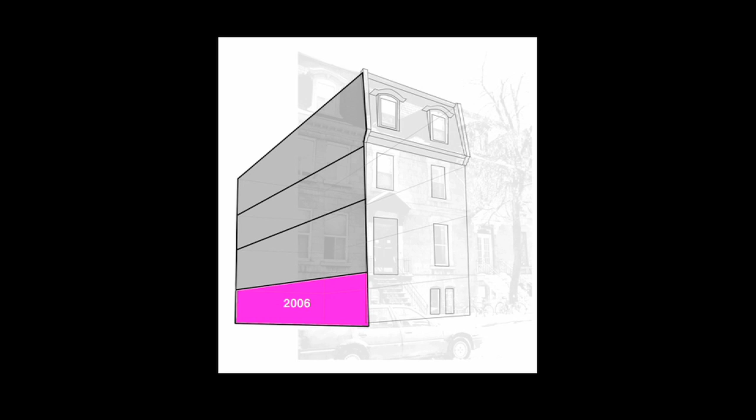I think this is a very practical way of starting up an office, to remain flexible in its organization. The sharing of infrastructure and resources between professional life and personal life makes sense, since the business of architecture is practically open 24 hours a day, 7 days a week. It actually makes your life a lot easier if your partner is your spouse, and some people might disagree. I don't know how Louis Kahn did it with 3 families, but that's another story.

So we used our house to practice, literally, and it was an extremely rewarding and fun decade, learning the basic difference between the line that exists on paper and its counterpart in the physical world. A simple opening represented by 3 lines on an elevation translates to cracked ceilings, desperately trying to save 150-year-old moldings that nobody knows how to reproduce anymore, lifting up a beam that takes 5 football-player-sized carpenters to hoist up, and hearing the whole building crack every time you cut a stud down.

So this was our kind of harsh reality of what construction could be. Another thing is, usually when you start out, this is the dilemma you're faced with. Everybody knows this catch-22, I guess.

So in many ways, I think design offices become multidisciplinary unintentionally, and we're constantly reinventing ourselves to respond to the arbitrary demands of the work that comes through our doors. This is made possible, of course, a little bit because of our arrogance and naivete, but more so we'd like to think because of our understanding that the contribution we make to society is not purely technical. So we often don't know how some things are done or built, but this is not necessarily a problem.

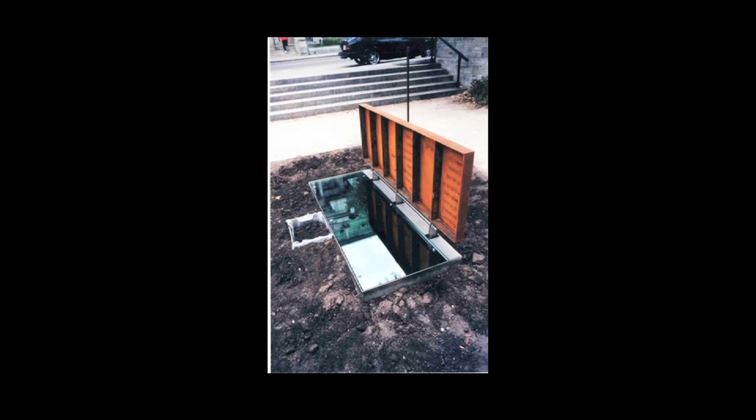It had an underground component to it. During the day, the mirror glass on the ground would reflect the doors of the Montreal City Hall. The site was right across from the Montreal City Hall. At night, the surface would project an image of the map of the first settlements from 1642. It was made out of corten steel.

Our practice began officially in 2001 with the resurgence of open anonymous competitions in the province of Quebec, as a result of a new policy put forth by the Ministry of Culture. It enforced a competition system to award contracts to any projects benefiting from public funds. The way it usually works is the government foots about 50% of the bill for construction projects.

At the time, we had very little knowledge about real construction techniques, so as a result of this lack of knowledge, we became extremely suspicious of the systems that are out there, and looked more into possible ways to collaborate with the trades to achieve a level of authenticity in our architecture that we admired in the works of many architects.

So a central preoccupation in the practice has been about making, I guess, the translation of intentions from one passive medium to an active one. A lot of energy was spent thinking how we could move away from pre-existing systems that have an inherent look to them.

In the context of North America, where contracts are drafted with the assumption that something would go wrong, this becomes quite a challenge, how to try to stretch the limits without voiding the warranty of what you use. So this was another experiment, back in 1997.

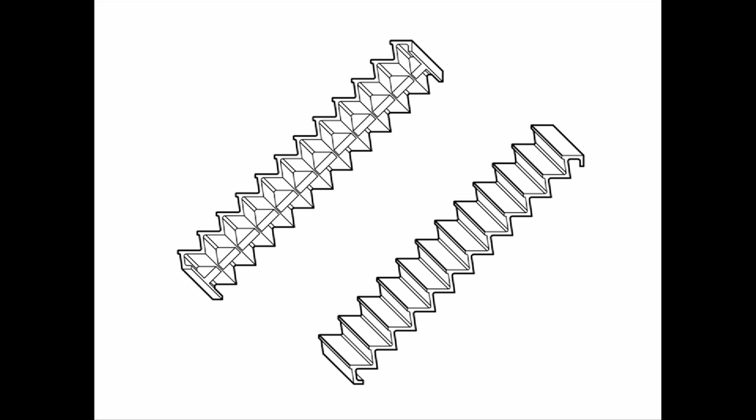It was a stair made of laminated plywood, built by one of my colleagues. His name is Dimitri Kubatis. We call him the human CNC machine. We're just using a flush bit with a router. He created a lamination of 22 layers of 7-ply plywood to extrude a stair with an integrated string groove in it.

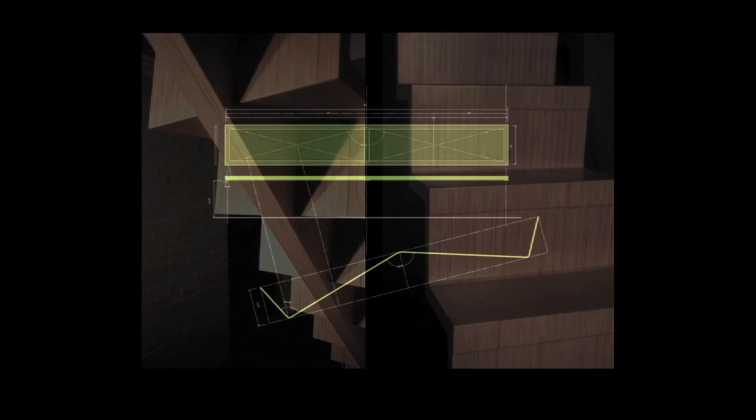It's almost 15 years old, but we still like what we did with it. I don't think there's a single architecture student who, coming out of school, did not design some kind of furniture, and this was another little experiment we did back then.

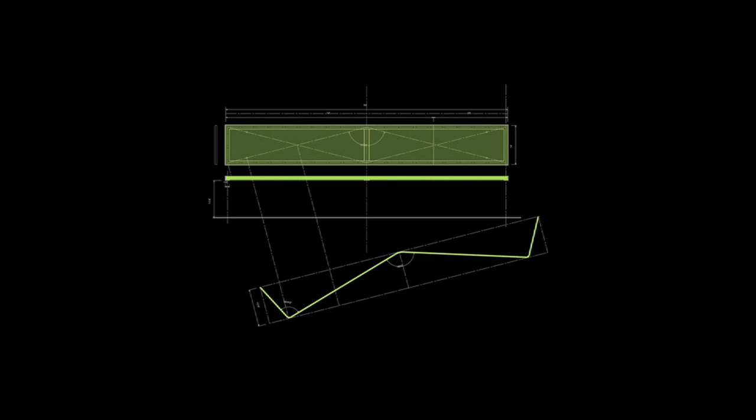It's a Belgian black stone bench floating on a cross brace of a half-inch, really thin stainless steel rod. Just by the way the rod is bent, you can support a lot of load on something very minimal. We worked with the same welder, using leftover materials from other projects.

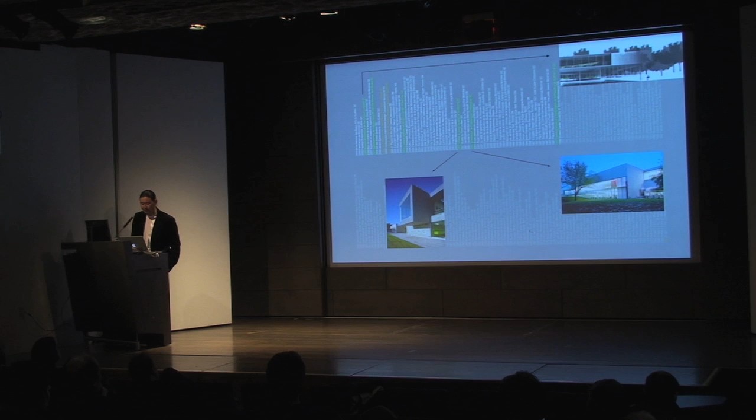So you'll notice that during those periods, we were not doing too well. We had a little baby and then eventually a second one. As Dan was talking about, it completely changes your life. Those were our turbulent years of trying to deal with family life and still try to run your own independent practice. The only thing I can tell you is that sleep and memory are very much linked together, and it affects your work.

The fact that most of the competitions are held in Quebec within Canada has certainly elevated the quality of the work. In 2006, for example, 8 out of the 12 Governor General medals, which is the highest distinction, went to Quebec offices. We got 2 for our first 2 projects, and we had a really good jury that year.

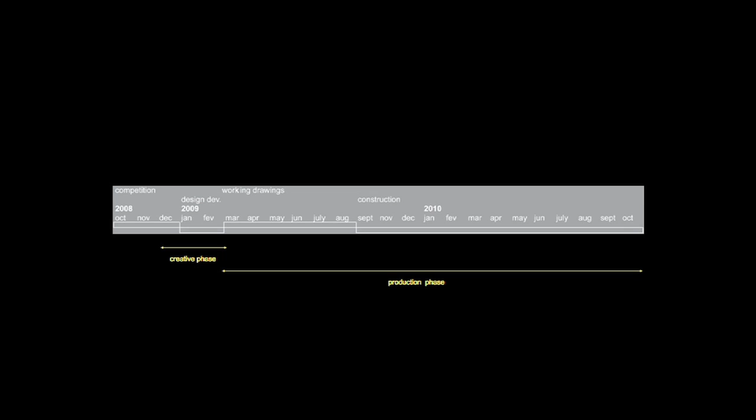All of this was great for us, and we thought our career might take off from that point on. But it didn't happen in the stellar way we thought. Instead, we were hit with a few hard realities of the profession, one of budget and the other of time frame. Our work stemmed from the process of architectural competitions that supposedly, through its mechanism, promotes innovation in design. We decided to look into the timeline of the architectural contract and came to the conclusion that the odds were stacked against us.

In our experience, the short timeline that competition projects offer means the design phase itself is extremely short compared to the actual execution phase. There's no doubt in our mind that competition encourages experimentation, but innovation, on the other hand, we feel is very much tied to construction costs and to time. To innovate, to do something new or different, means to some extent deviating from what the construction industry knows how to do, which usually translates to costing more money or more time.

When we think of innovating, for example, with the building envelope, it implies having the time to do research, to build mock-ups, to work with the industry, trying new assembly methods, and still, while doing all of that, making sure the client can maintain some kind of warranty for the system being placed. So this has always been a problem in our design process.

And from this mindset, our interest in the practice of architecture grew as a way to cope with the seemingly impossible reality of having a productive career that was both personally fulfilling and sustainable, not in the ecological sense, but in the sense of sanity, especially with children making it that much harder to have a productive and fulfilling time designing things. Not that they're bad, but you just don't have the time to do it. This is an ongoing research in our office.

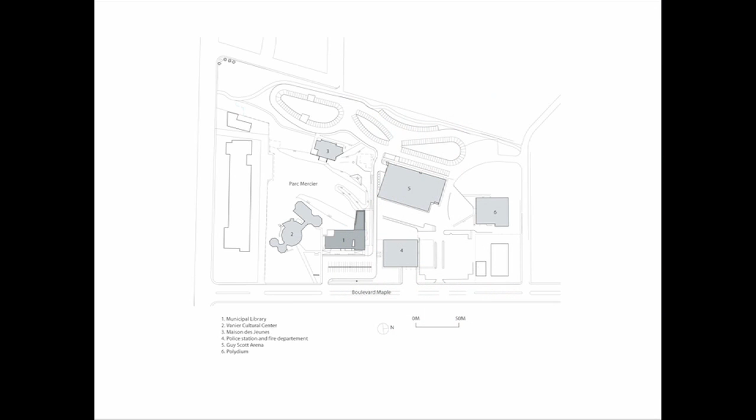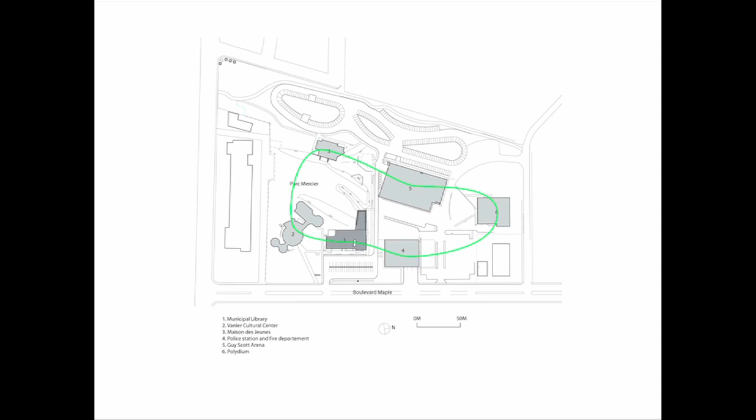So the actual site of the competition was the Civic Park, circumscribed by buildings which housed some civic functions. There was a gymnasium, a skating rink, a swimming pool, a cultural center, a newly erected youth center, and a police station right next to it.

So our strategy was to integrate these level changes that result from the undulations into the organization of the building program. We also wanted to have as small as possible contact to the ground to disturb as little as possible the existing park and its trees.

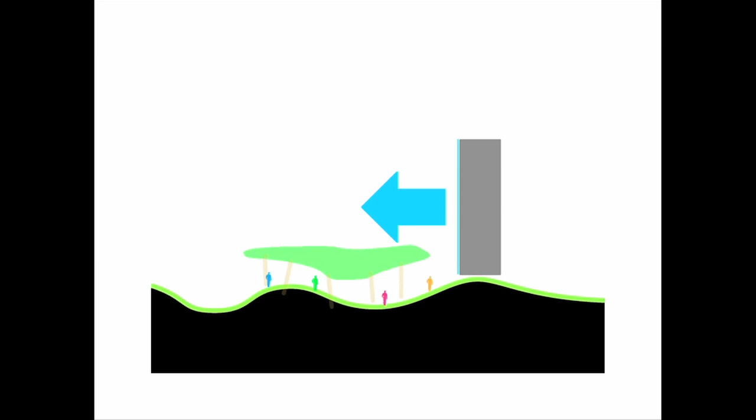So we first imagined a 5-story tower of books which would become a backdrop to the civic park. So the life of the library and that of the park start to create a dialogue.

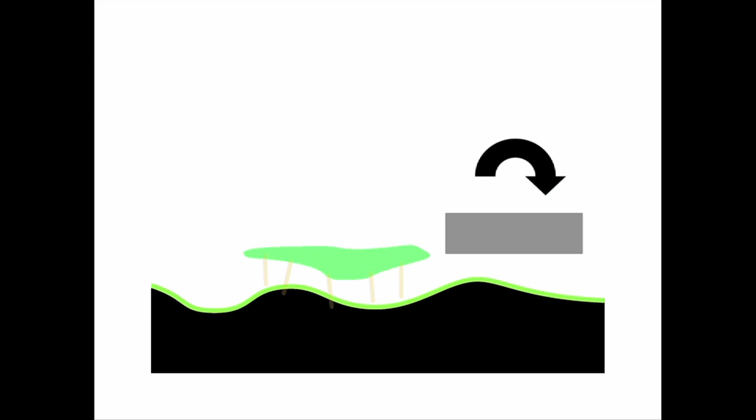But after the first phase, we were asked to lower the building to a maximum of 3 stories, and so the tower got turned to its side. This was actually an interesting thing for us because now we had this hovering volume over the landscape.

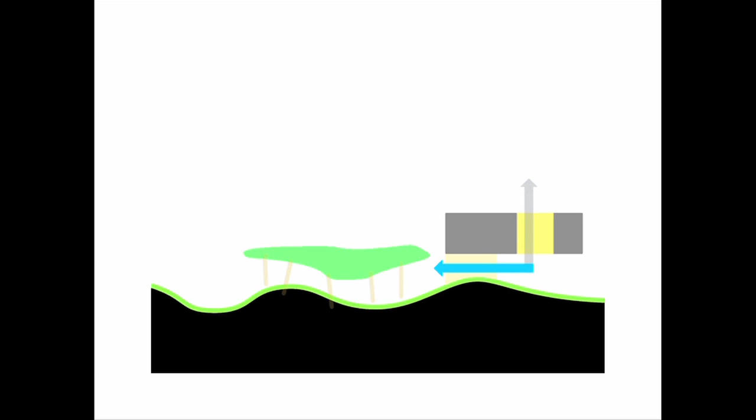Because we maintained a small contact of the building to the ground, we could start blurring the edge of the building. What I mean by that is that one starts to experience the architecture before you are inside the building itself. This is further reinforced by introducing 2 light courts into the rotated tower, which organizes the reading room inside by providing natural daylight and also connects the outside to the inside of the building.

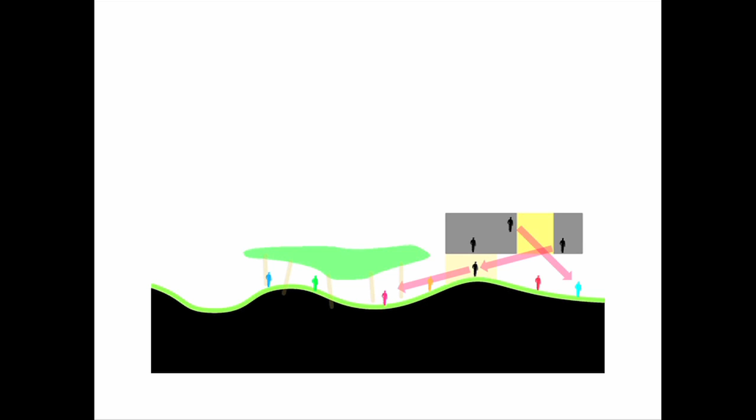By separating the program of the library in terms of noisy zones and quiet zones, the basic organization of the library became the noisy part on the level of the park, and the quiet part here in the gray zone, in the upper 2 levels.

So just to briefly situate you, here is the main entrance into the building, the ground floor, the 2nd and 3rd. You can see the 2 light courts represented in yellow and a blue children's mound that's related to the children reading area.

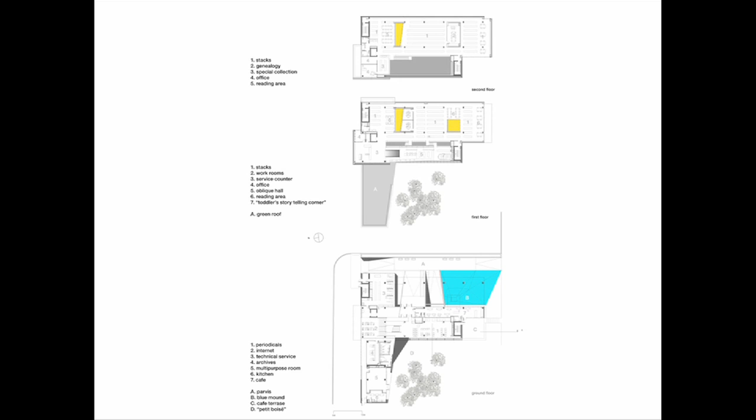So the ground plane of the building follows the contours of the site, and it splits in 2 via a grand stair. This is the ground floor plan, and this was the active, noisy part of the building where people in the park could stroll into the library from all directions.

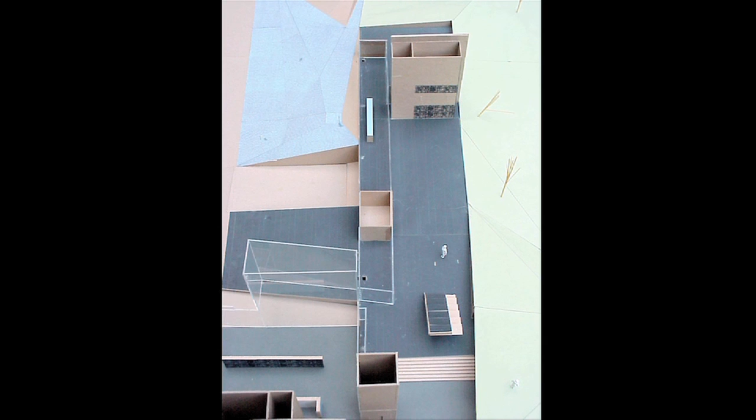We strongly wanted to open a glazed facade to the park itself, but it was refused by the librarians due to control issues. The more traditional functions of the library were located on the upper 2 levels, as you can see here.

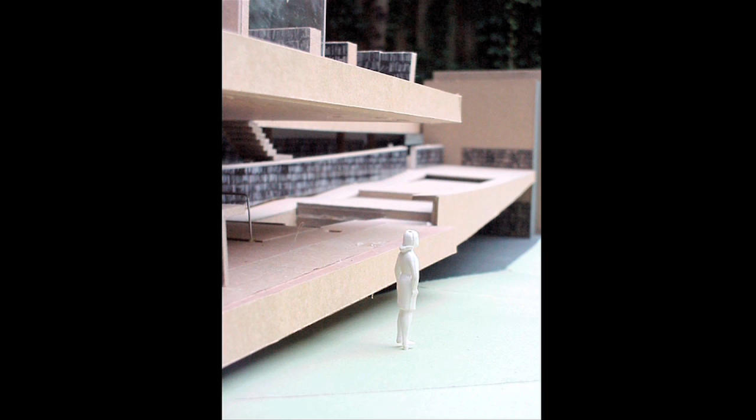As you puncture through the main staircase going up, you arrive at this quiet part of the library that starts by this sloping plane, which we call the browsing plane, where all the references of the library were located.

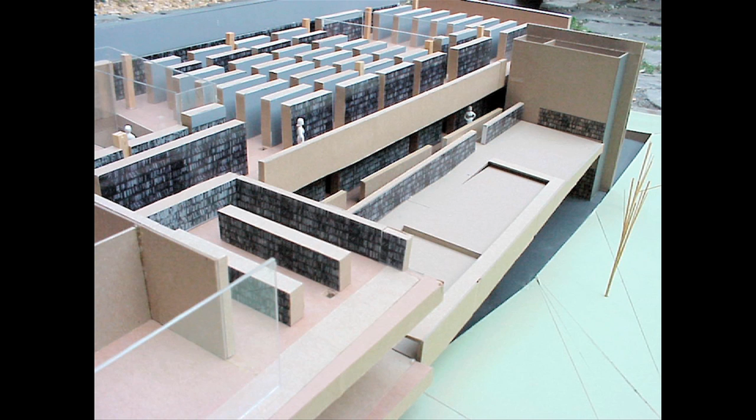We saw this as an artificial extension of the natural topography, so the berm of the park comes to meet that sloping plane. We wanted to create a close connection between the landscape and the inner spaces of the library. This sloping plane or platform is where you actually do the research, look up books, and where loans and returns are controlled, giving visual clues as to where the collections are located. Here the stair goes through the sloped plane, and on the right a signage wall was created to indicate all the collections.

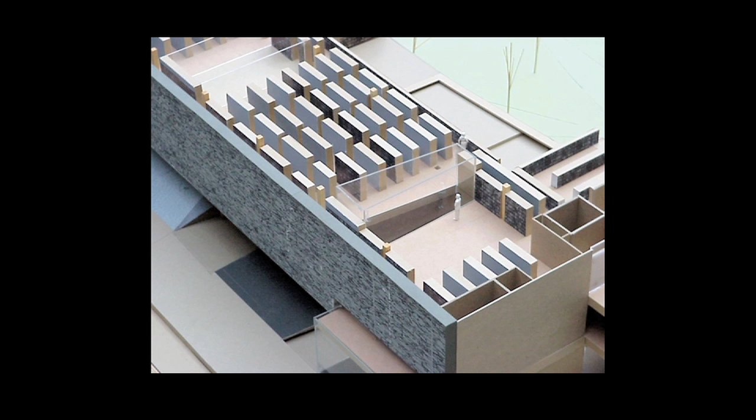Once you arrive at the browsing plane and find a book, you enter into the dense stack of books. Within this, you discover clearings, which are reading areas, giving you views back to the exterior, as well as diagonally between different floor levels.

The idea here was that on the landscape plan, we wanted to introduce this blue mound made out of rubberized asphalt. My partner imagined it would be amusing if kids could tease each other as they're stuck doing homework, and their friends could come up without actually entering the building, poke their head in, and call out to them. We like this kind of play and whimsy in our projects.

The structure of the building was quite straightforward, except perhaps for the sloping floor and green roof, which was conceived as a continuum of the landscape.

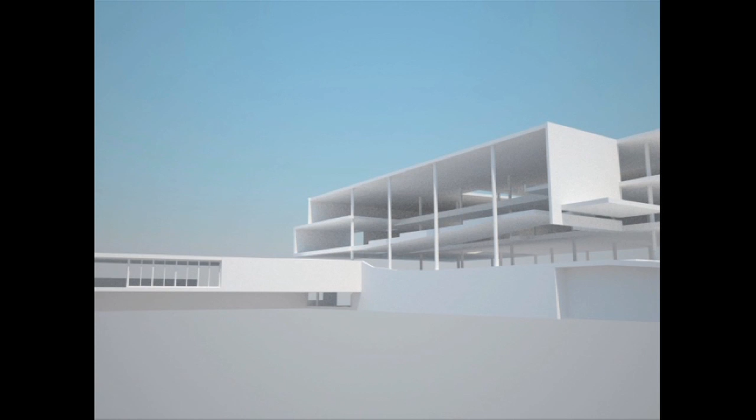Originally, we imagined that the underside of the sloping floor should be free, that it should float over the landscape, kind of like this, to reinforce the sense of continuity.

Initially, we thought we could delicately suspend it from the ceiling, and we had visions of fine, elegant suspension members holding up the sloped floor.

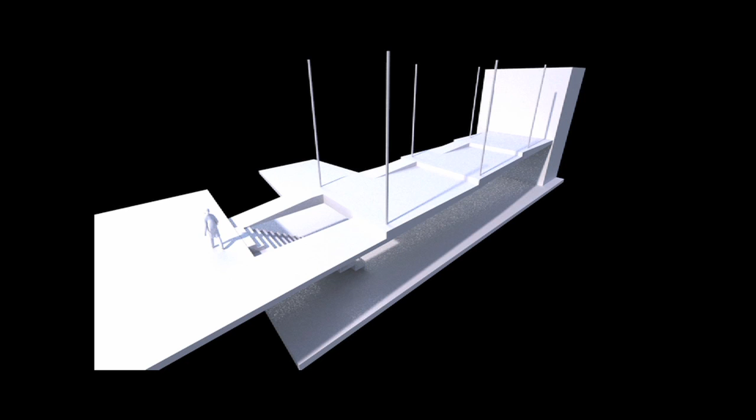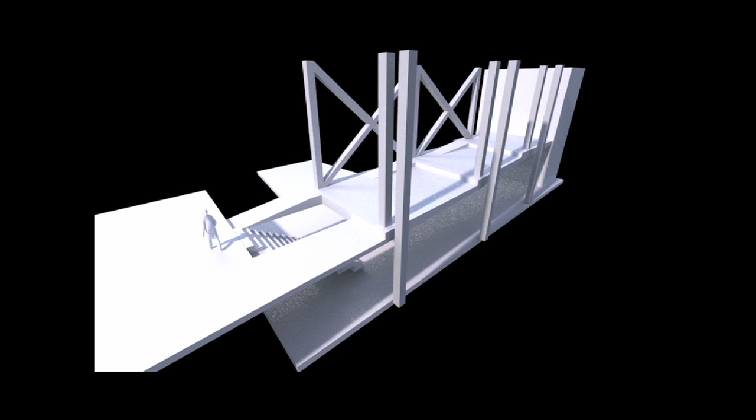Then the engineers came back with their own version, which completely clogged up the actual sloping floor. After several ineffective attempts to deal with them, we concluded that perhaps we should just hold the sloping floor delicately with inclined columns, so that the columns act as artificial tree trunks. We introduced instead this 30-meter long post-tensioned beam to liberate any kind of structure from that sloped plane.

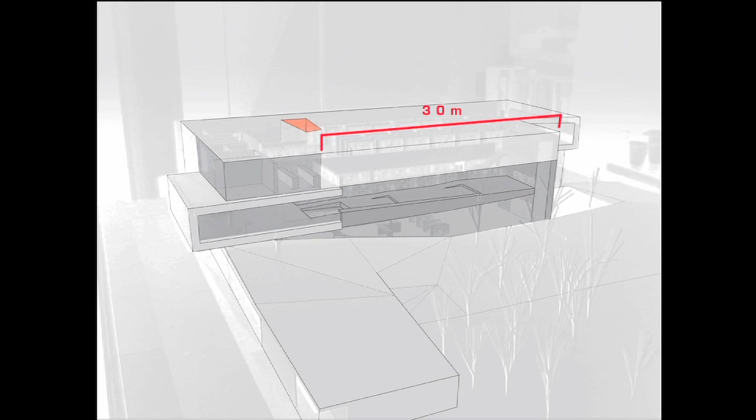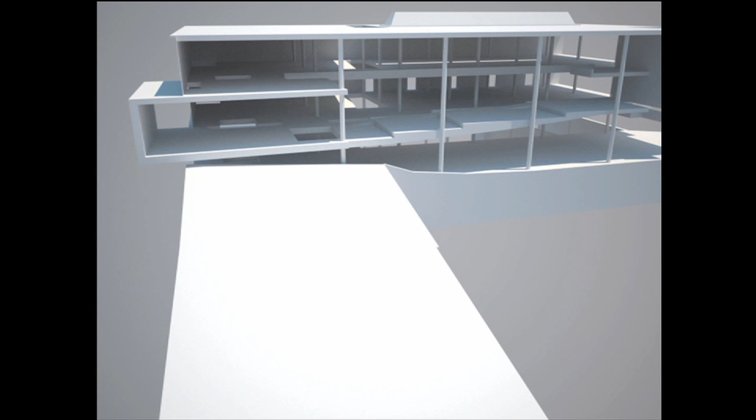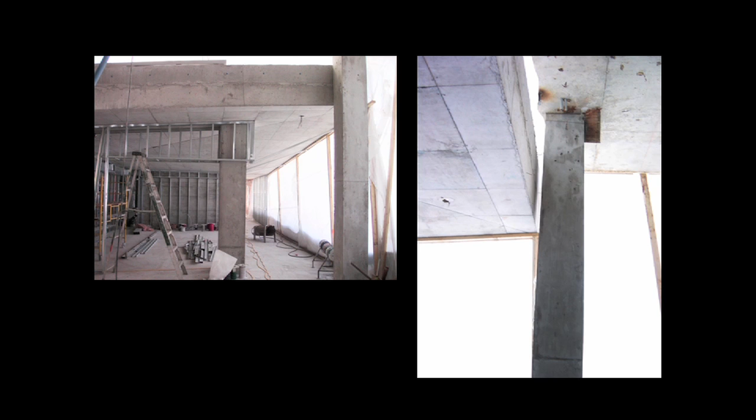This part was kind of a triangulated plane, and we wanted it to be completely independent from the rest of the building structure, so we had to come up with this column that is essentially a few inches away from the slab that comes to meet it. Obviously the engineers find it completely inefficient to do something like that, but we needed that tension in the experience to emphasize the feeling of going underground.

We were very involved with the site supervision phase, and it was fascinating and daunting to see the lines we drew becoming solid walls of concrete. Obviously there are no undos once you get to the building point.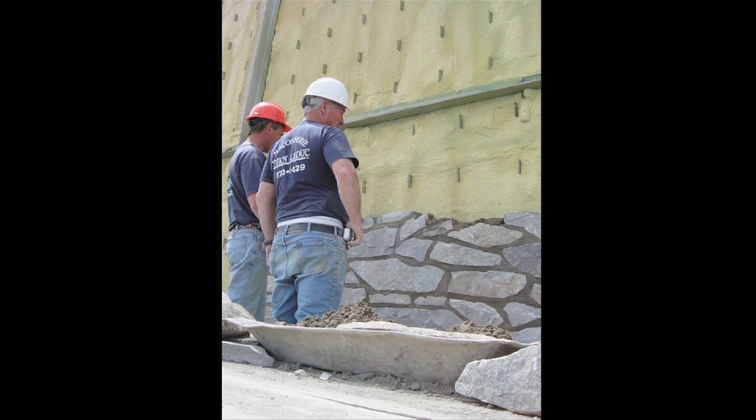Being on site is the best way you can learn about other ways of doing things, and this is another advantage of running your own office. You get to spend a couple of nice afternoons talking to the workers on site.

The next project, the competition for the theater in Terrebonne, was announced the week our tender documents for the library had to be finished. We literally finished the working drawings, and the next morning we started working on the competition for that. This was another two-phase anonymous competition.

The site for the Vieux-Terrebonne was a contrast to that of Chateauguay. It had a lot of history, and it was beautiful, and frankly, it was, in our mind, quite inappropriate for a theater, in a sense.

This is the old part of the city of Terrebonne, and there is the green area along the river. The whole area was developed by local residents, and this is one thing that is quite unique in Montreal and this periphery — a lot of these grassroots organizations do a lot of preservation and make projects happen. So it has a library, it has a sculptural garden. It's all quite beautiful.

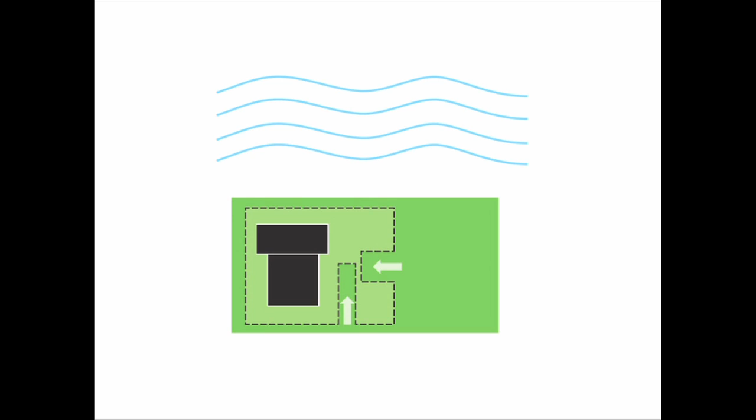So we imagined spatial experiences in the form of gardens inserted into the theater. This was not an additive element to the given program, but a way to requalify it, expanding the program of the theater beyond the boundaries of the physical building envelope.

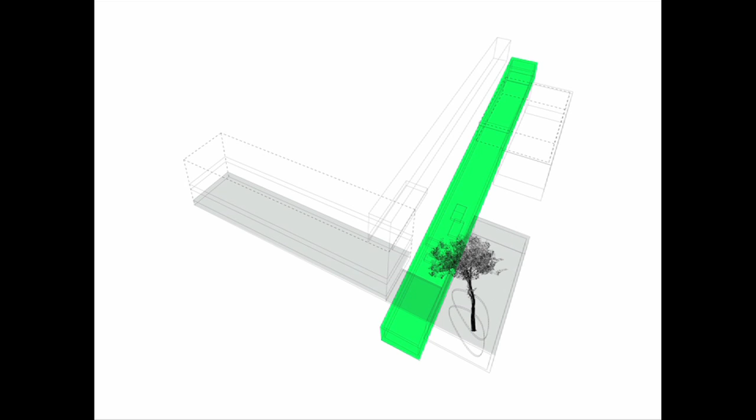As a visitor to the theater, moving towards the auditorium proper becomes the predominant part of the experience of the building, so we wanted to make this movement the primary spatial quality. Instead of imagining a series of program elements connected by circulation, the circulation morphs to accommodate the programmatic requirements. The gardens that cut into the building allowed us to create a platform to investigate a new kind of relation between the visitors to the park and those to the theater.

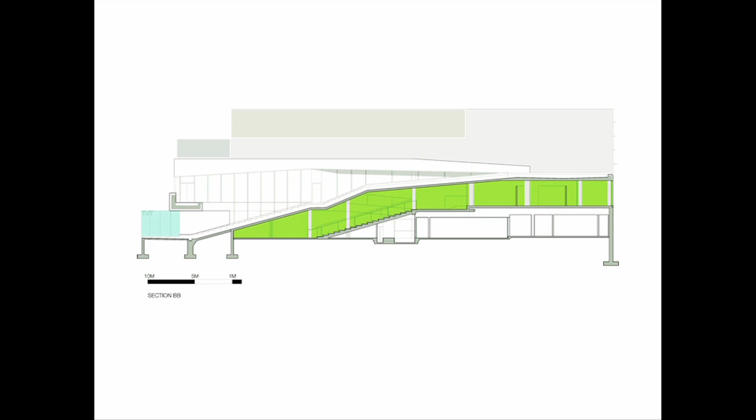So we introduced what we call the double-deck stair. In section, there's an inside stair and an outside stair, one going to the roof terrace, freely accessible from the park, and the other going to the upper foyer. This physically puts the stroller in the park on top of the visitors to the theater. The lower interior stair is for accessing the balcony levels and the bar, and the upper exterior stair accesses the rooftop terrace directly from the park.

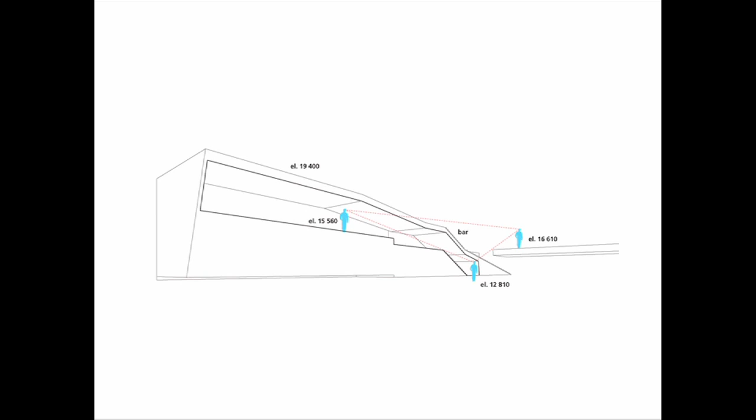So the bar becomes a reference point around which you move, and after all, alcohol is an important social lubricator. The idea is that the life of the park intersects the activities of the theater and animates it, creating a symbiotic relationship between the two.

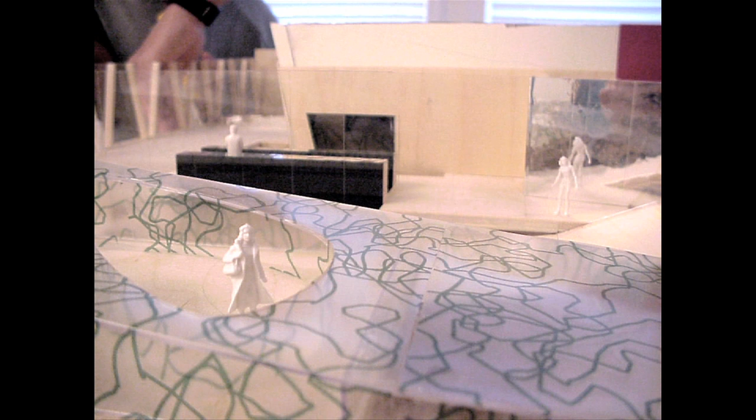We're also interested in the spectacle of theater going as a social act, where being seen becomes as important as seeing, where the observer is clandestinely transformed into the observed.

This becomes particularly true for people who purchase the more expensive loggia seats with their own private bar in the back. Here in blue, in plan of the balcony level, the red is the corridor or the program space.

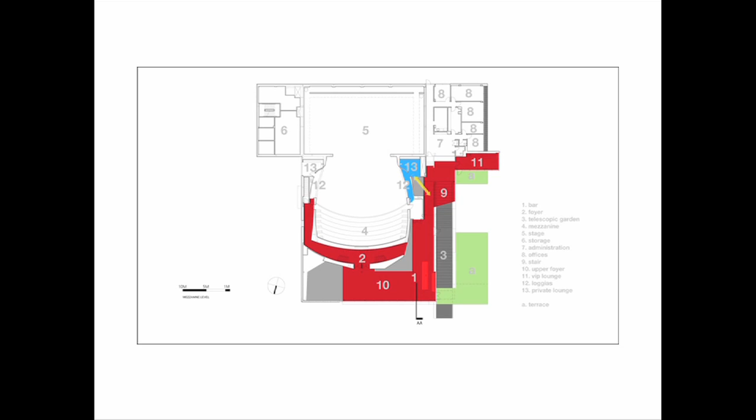So you move towards the spaces that are reserved for the exclusive, and at the end, you kind of pop back to where everyone is, creating an involuntary exhibitionism and giving an audience to the VIP. They're also visually interconnected between themselves, so the upper level loggia can look inside the lower level.

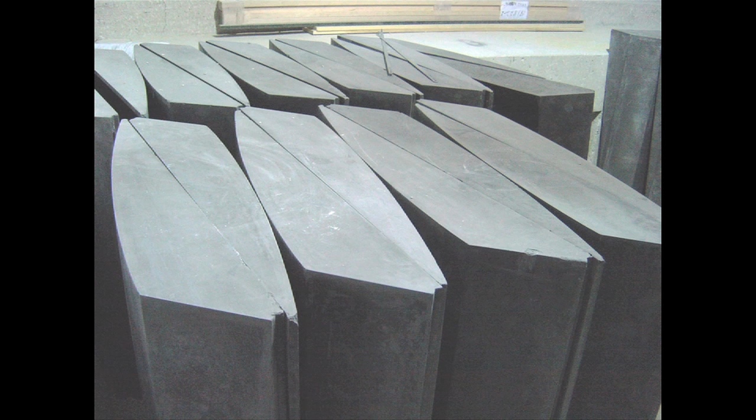So as I was saying, the production architecture in Montreal, and probably North America in general, tends to become very prescriptive. This is particularly true with the exterior envelope of the building. Oftentimes you end up specifying products from catalogs with minimum and maximum dimensions, certain acceptable details, so you won't void the warranty.

We find this a very frustrating part of the practice. So when we were asked by the acoustic engineer to come up with some kind of wall treatment, we jumped at the opportunity, wanting to try to do something from scratch.

We had met this rep, a Moroccan artisan who does traditional Victorian moldings, who had visited our office because he's a resident of Chateauguay. So we called him up, and we produced three types of acoustic panels for sound propagation out of fiberglass reinforced plaster.

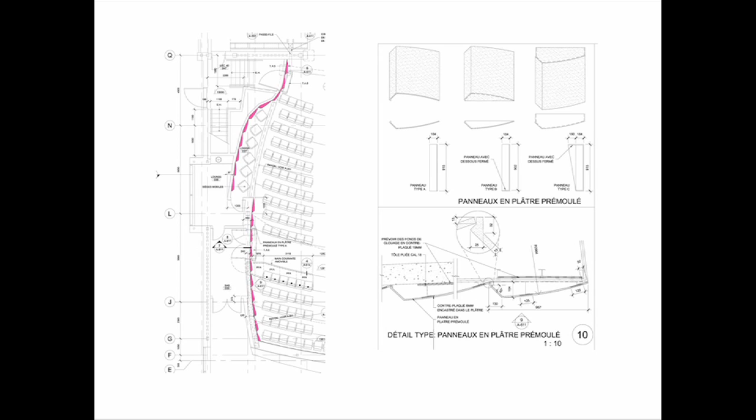An acoustic consultant usually does this in MDF, which he paints, and we find MDF a terrible material. So this guy basically produced all of this in his garage, about 900 little panels on his own, and came on site and hung them.

So this is some of those views. They are gray because of the requirements of the theater consultants. The interior of the theater had to be easy to control in terms of lighting.

But instead of just painting them, the pigment itself was mixed into the plaster, so even if it chips or cracks, the color remains the same throughout. With time, they would develop a patina, like how certain natural materials like stone or wood would do.

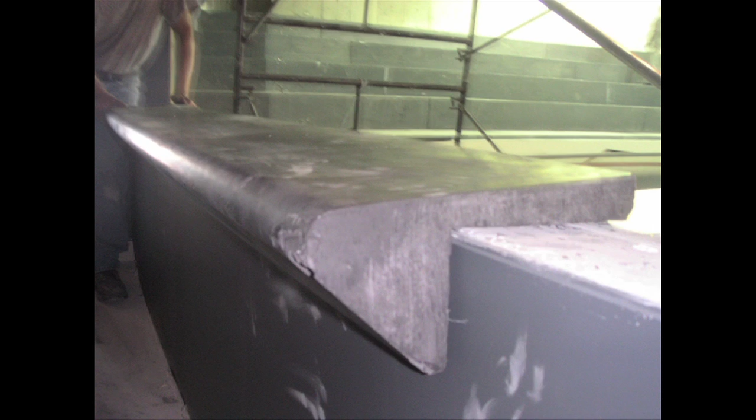So we also poured some of the coping details on the theater. And this is some of the views of the interior of the auditorium.

We do a lot of mock-ups in our office. We don't do the real size, but we often do some in foam core. Specifically, we're trying to check the clearances because they're quite deep, almost 16 inches deep, and see how it would feel once you're sitting on the upper levels. And this is kind of a finished view of it.

So here you can see all the panels covering the walls of the auditorium, and this is a close-up of the panels. The blue light is from the private lounges that the VIP people could use.

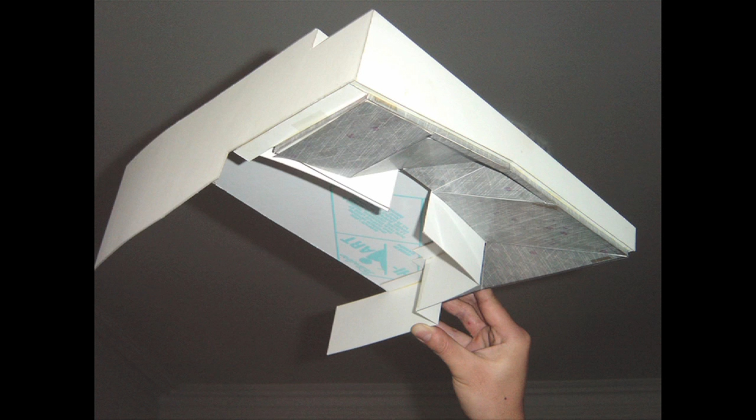This was another exercise in budget cutting. We had created this topographic ceiling plane, and here we use expanded metal, kind of like here actually.

It was interesting to come in here to see this. It's much nicer here, but back then we were just trying to solve a very serious issue of budget. We discovered that we could just use perforated expanded metal and bend it to give it some stiffness and create our own interlocking system.

The whole ceiling, in terms of material cost, was so negligible that it was obviously accepted by the client. And the ceiling kind of sinks down into the lower level.

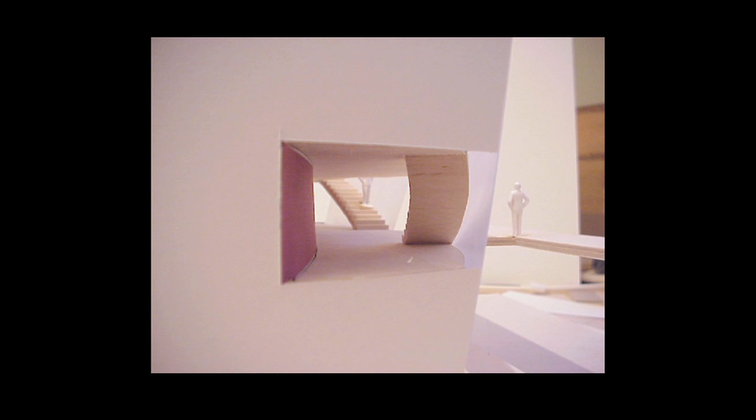This is the main lower level, this main stair going up to the foyer. We were exploring all kinds of things, doing a lot of large-scale models, and the great thing about big-scale models is that you suddenly find a lot of fat in buildings that already exist, especially in building types like theaters, because there's a lot of level changes.

So we created an extra space without paying more for it by using the underside of the seating. That was a small little room that you would enter that acts as a SAS for the upper level, and from that you could look back out. So we have these kind of extra spaces that look inside one another.

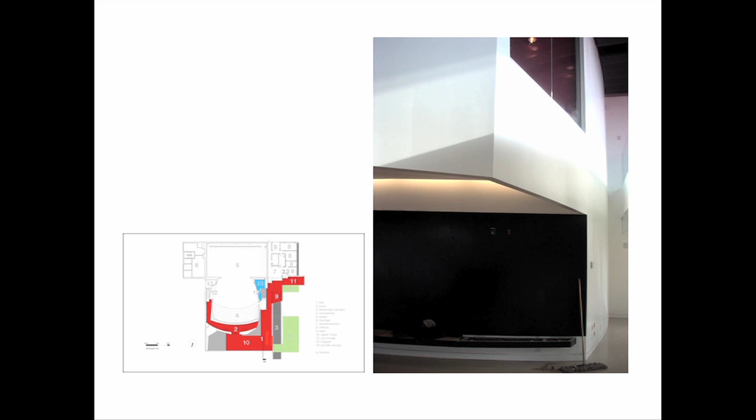And here's the shot of that room. It's all painted in red for the sake of drama. And then the stair taking up to the balcony level.

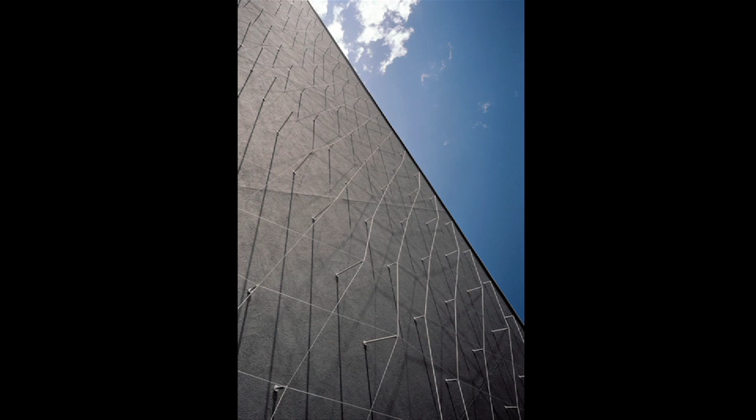And this was the back side of the theater. We devised a little trellis for support for a vine over the cheap stucco material that we had to use.

As part of the siting strategy, we mitigated the height of the fly tower by berming up the landscape. Then we kind of extended that same motion with an undulating green wall that still needs to grow. This green wall wraps around the corner of the roof terraces, and this is where the administration block is.

The people who work inside on a daily basis can just step out into the theater itself, into the park itself, without going through the main entrance.

So this is the double deck stair with a VIP lounge kind of hovering into the park. Here's another view. And this is the kind of green room right underneath it, painted green.

And the rest of the building was covered in zinc using a traditional method called tôle à la canadienne, which is a Canadian-style flashing, if you want. So local people who do a lot of silver flashing roofs submitted to do the work. So we kind of used that.

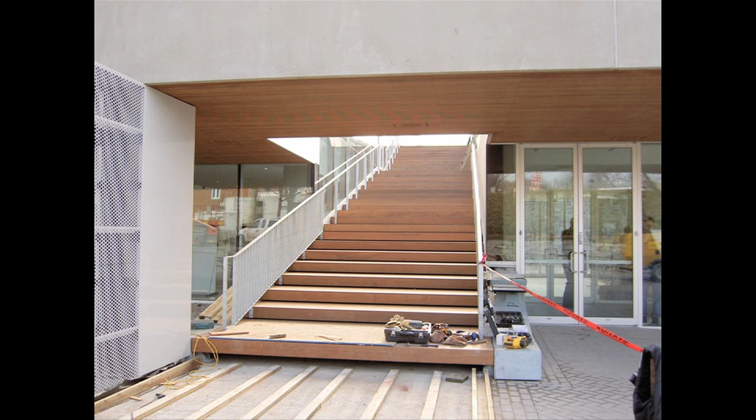And this is the exterior stair going up to the roof terraces. And here, the materiality of the soffit is quite important for us because we wanted to express, kind of give a sense of puncturing through a mass.

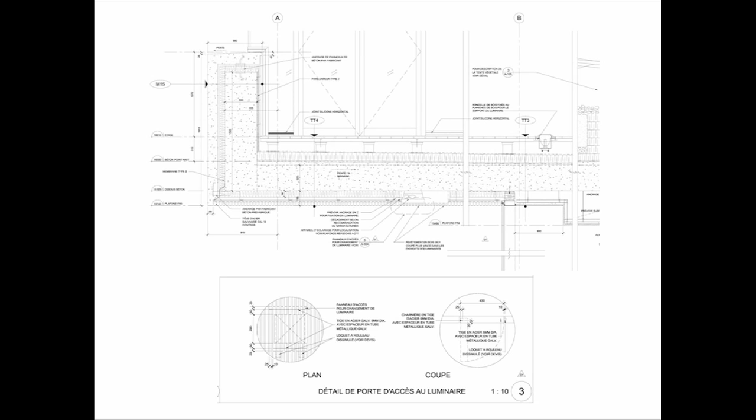So we didn't want any sort of articulation in terms of whatever that needed to be put in there, so the lighting fixtures were kind of embedded. And every time you have a lighting fixture, you basically have a play of spacing, so the lighting could be integrated within that.

And this is the third project that I will talk about, which was our last competition entry that dates back to 2008. It was another municipal library project in St. Hubert, which is another community south of the island of Montreal.

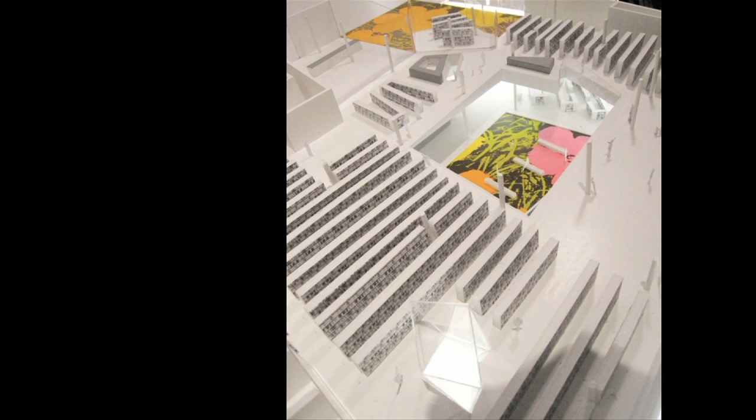So in our 15 years, we've always kind of worked outside the island. We haven't been able to build on the island of Montreal yet. We're still working on it. And it is a typical North American suburb with very little context to speak about.

We also came to realize that due to its geographic location, St. Hubert benefits from unique meteorological conditions, resulting in remarkable potential for wind energy. So we wanted to imagine the potential for the architecture of the new library as sculpted in response to this force of nature, poetically materializing and celebrating the presence of the wind while technically seeking to take advantage of the resource for its bioclimatic strategy.

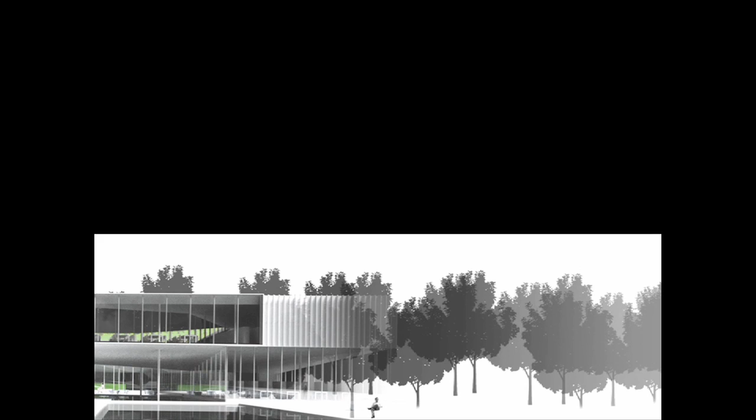So the concept became very simply a flying carpet made of wood, a filigree construction that would levitate over the site and would symbolically give back the wood to the forest itself. So here's one of the first competition renderings.

The upper part of the building is what we think of as the habitable thickness of the flying carpet. And while the ground floor remains transparent, it opens up onto the public place and it creates a dialogue with the tree trunks. So as such, the architectural concept of the flying carpet was not thought of simply as an architectural gesture,

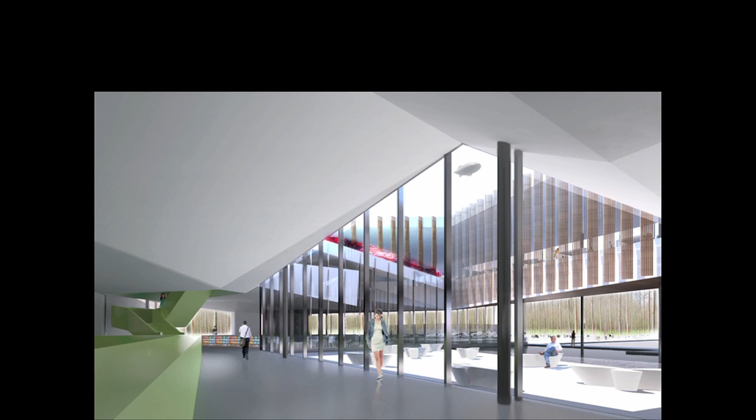The envelope was conceived as a climatic device, or the filter around which you organize your program. This is the view from the ground floor main service counter looking back towards the public space. The programmatic elements are organized in a single continuous movement that unfolds from the public place to the forest, delineating a central open court, very much like the cloister of a monastery.

This exterior court forms the geographic, social, and perceptual heart of the building. It's a variation on the idea of the cloister as a contemplative space, a space of light and quiet where the reading room is located. And as with the traditional cloister, one circulates around it to go from collection to collection.

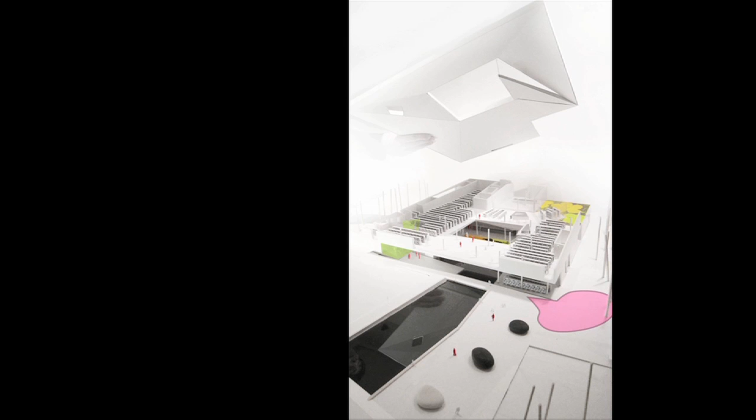So just to orient you, here is the overall shot of the model showing the public place with the retention basin for rainwater collection. That basin also acts as a proper threshold to the park itself. You see also very well here the geometry of the roof, which is reflected in the ceiling topography. The ground floor plan forms a U, while the upper floor plan becomes a full donut.

The full donut obviously delimits the cloister, and then all the collections are organized around it. On the front facade we find the main reading area, bridging and forming the porte cochere, which is meant to be the gateway into the public space of the library.

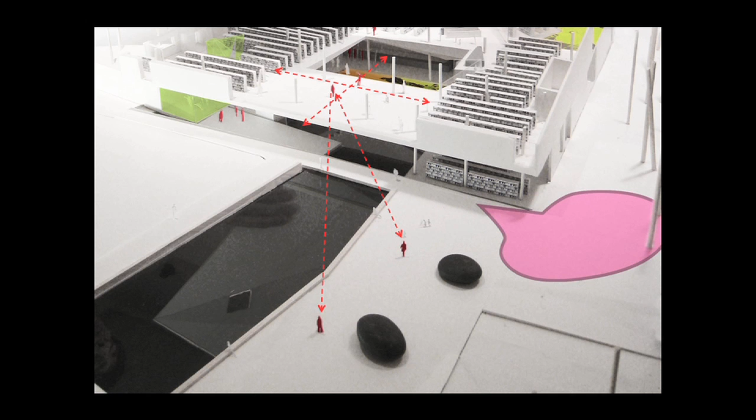It also acts as a programmatic signal for people walking in the park, so they can see people reading in there. You can see on the model how the roofscape was shaped according to the prevailing winds on site.

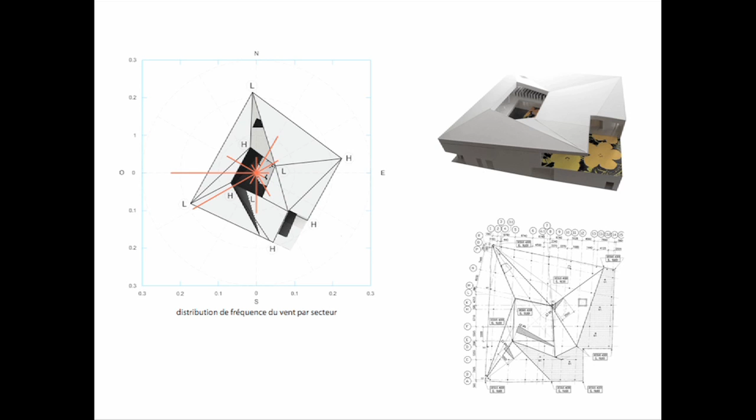Essentially, we positioned the building using data of predominant winds and tried to sculpt or adjust the heights of the roofs so that we could create a natural ventilation flow that would help the interior ventilation.

A large amount of floor-to-ceiling fenestration and operable windows also allow for an intimate relation with the park. A lot of our buildings used to be closed, especially libraries where book controls are important, but we wanted people reading to be able to smell or feel a breeze as they're reading.

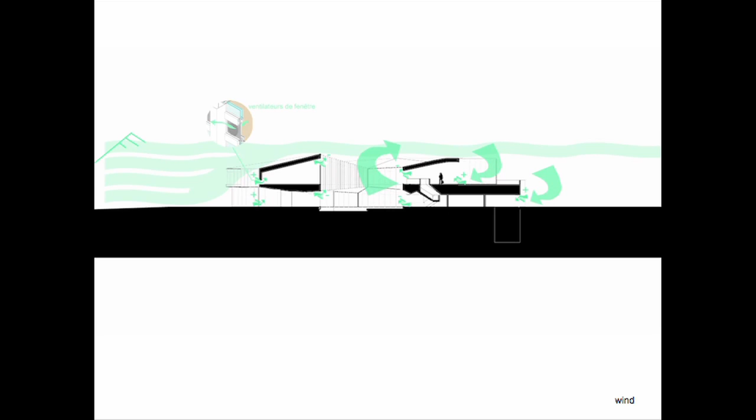In the summer, the rain collected in the retention basin will evaporate and further cool off the microclimate of the court. The building is also equipped with passive geothermal systems, and when cooling needs exceed the passive geothermal capacity, geothermal fields would provide 100% of the building's energy.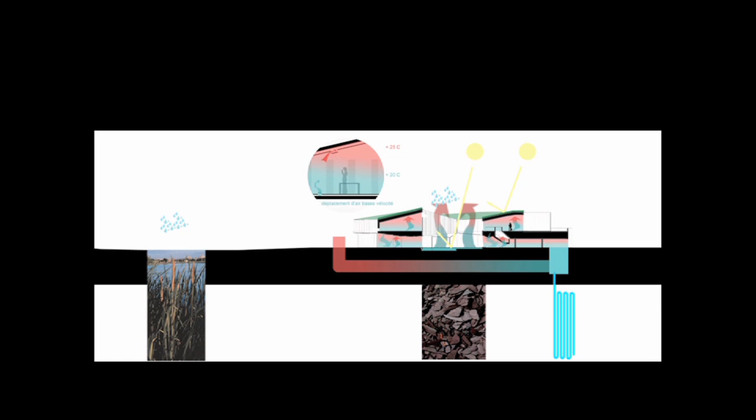Here was the structural strategy we put forth to the engineers during the competition. Unfortunately, engineers do not get very passionate about architectural competitions, and we learned from our past experiences that unless you come up with something to deal with the budget issue, which is a central concern for us in Montreal...

We don't build for $30 a square foot, but our budgets are not extravagant either, so we wanted this to be buildable by anybody who deals with steel. We came up with this idea, essentially laying the grid out, and identified which would be special steel members.

Here it's represented in the red beams, which have a kink, and the yellow beams are the ones that define the valleys and ridges. The rest of the structure was basically the same as a standard Home Depot kind of construction.

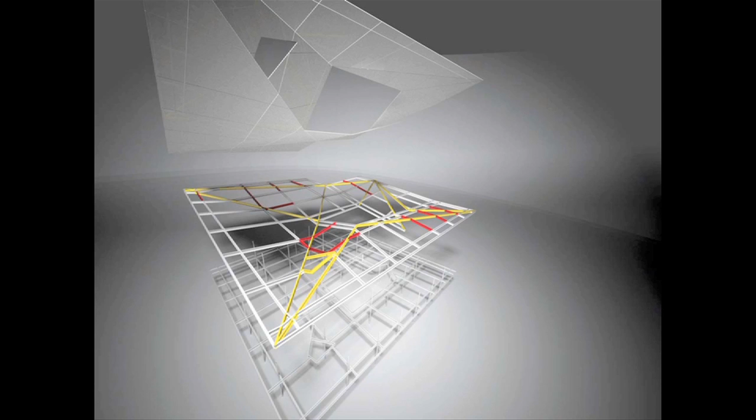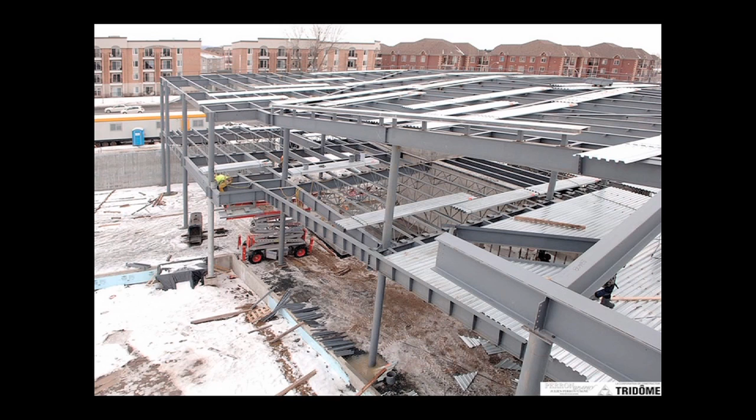That kind of convinced the engineer — that got him very excited, and he really got involved in the project from that point on. Here you can see it in construction, and you can almost see the topography of the roof forming.

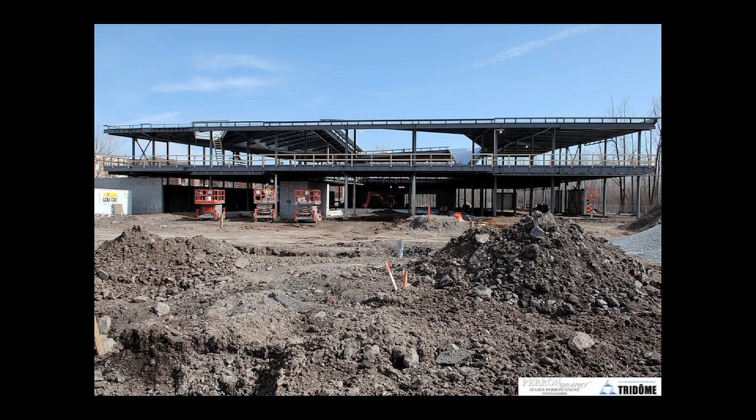This is the overall building in its skeletal form: the very important opening to the sky, the piece of garden that descends to the reading room, and the gesture that can be seen all the way from across the parking lot or from the arrival to the site.

I really resent the fact that envelopes are so thick in our climate, because there's something beautiful about the structure. I often think of what Niemeyer said, that once the structure is done, the architecture is finished — I find that really true to what we do. And here's a quick model of the corresponding ceiling topography; we make a lot of these small models.

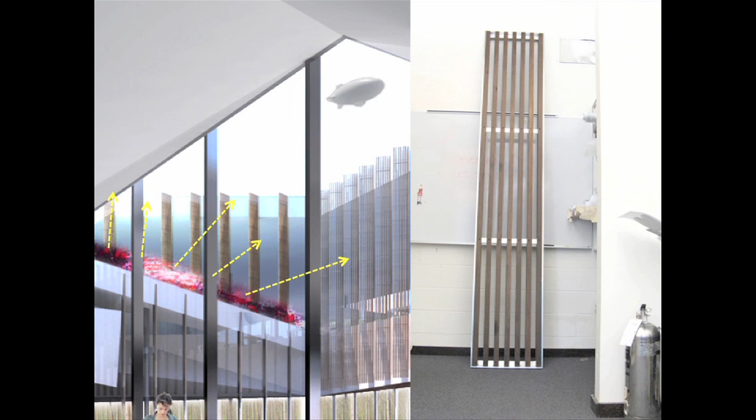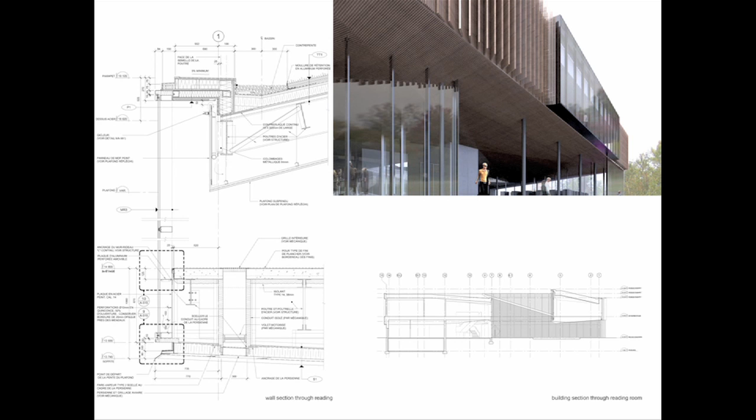And then our filigree construction, and this was some of the views from the inside, looking out through that.

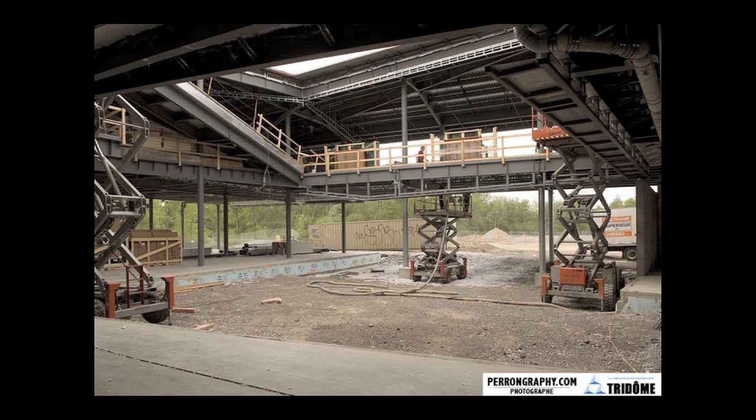Again, going back, some of those views in structural, kind of a diagrammatic form, where the building is in its nascent form, where you can actually start to appreciate most the relation to the forest and some of the interior spaces.

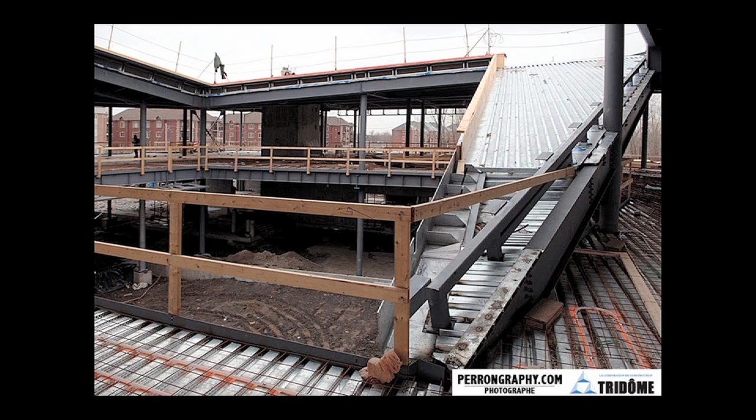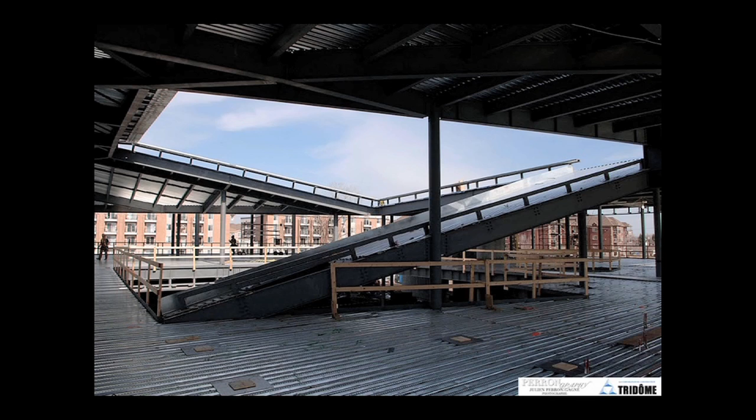And this was another realization on site, that it is quite difficult to build a triangle coming to a point on a big building, because then all the water and snow would accumulate there. So it was a big learning experience, but I think here you can start to see the roof participating in that space.

And the building has, because of its form, sectional qualities that are unexpected and actually quite wonderful, that you can see part of the facade and part of the section through this from one standing point.

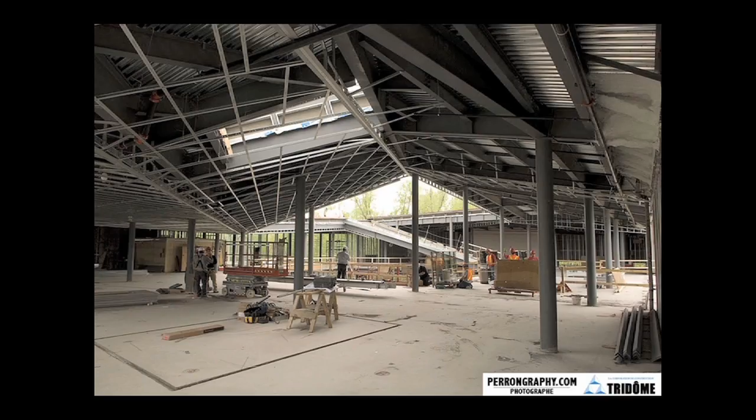This is the structure kind of shaping up. And then some of the interior working rooms with skylights. We call this the North Star.

Okay, the last bit I would talk about is the wood itself. In institutional buildings, wood was not very welcome because of maintenance issues. But we really wanted to push the idea of the wood, because of the forest, and the idea of giving back the wood to its wood.

So through research, we found this carbonized wood, which is essentially baking the wood so that it is completely dried up, and it was a method. It was interesting because you can use woods like poplar, which are essentially reserved for interior uses, only on an exterior cladding system. And they're quite nice wood because they have uniform grain.

But the problem was that the client had never really used it, so they really wanted us to be able to guarantee it. So one way of managing that risk was for us to come up with an idea that you could make this in panels and then have it removed if ever something goes wrong.

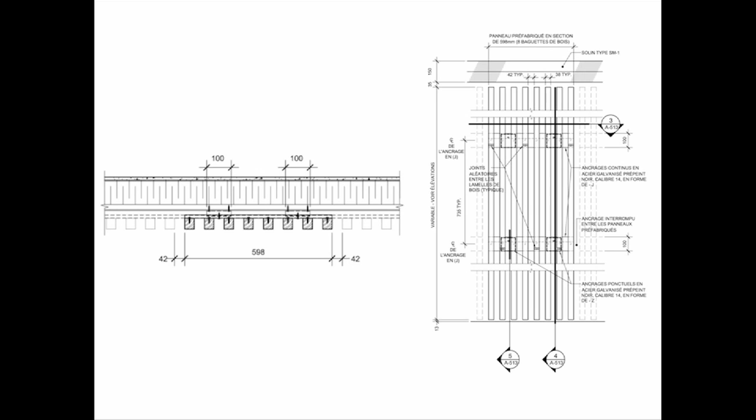But at the same time, we discovered that because the hourly wages between workers in a shop are different from workers on site, which is much less expensive than workers on site, it became a real money saver to propose it like that. So the building, this is the panels starting to go up on site, and then they're all done in 2-foot sections, so you could actually take it off if something goes wrong.

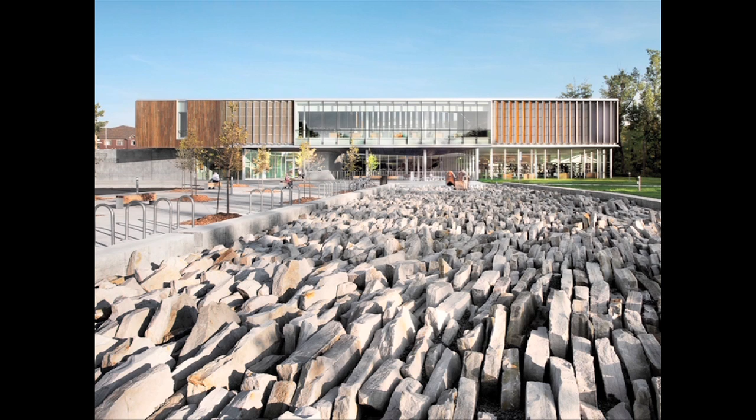And this is the view of the water basin where the rainwater percolates through those stacked stones. We didn't want it to be a reflective pool because the water would never be clear enough, but that it would actually create vegetation through the rocks was interesting. And that's my last slide, and thank you for your attention.